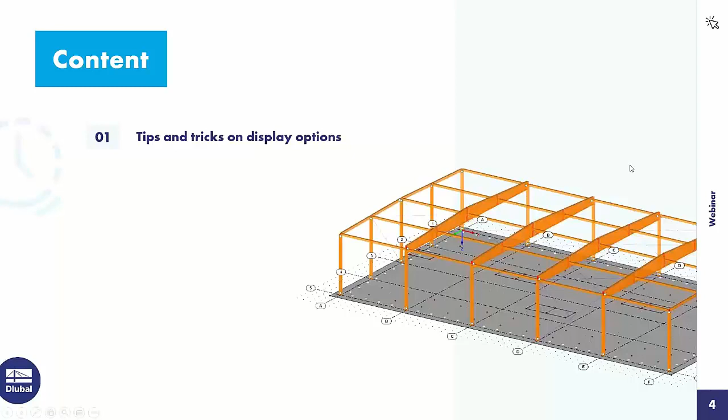To the agenda today, I will introduce some tips and tricks on display options, also on the printout report, also basic information. I do a single and mass print of graphics to the printout report. And I show how to create a verifiable printout report. We turn directly to the program.

RFEM, that's a storage building made of timber and a reinforced concrete floor slab. Bracings from steel, you can see around here. The model is completed, it's designed, the timber structure is designed, and also the concrete structure.

We can go through the load cases, self-weight with roof loads and single loads from racks, snow load, the imposed loads with loads from forklifts and from the racks. Wind in X direction, Y direction. Imperfections in X direction and Y direction. Pre-stress. And then there are a lot of load combinations that are automatically created by the program.

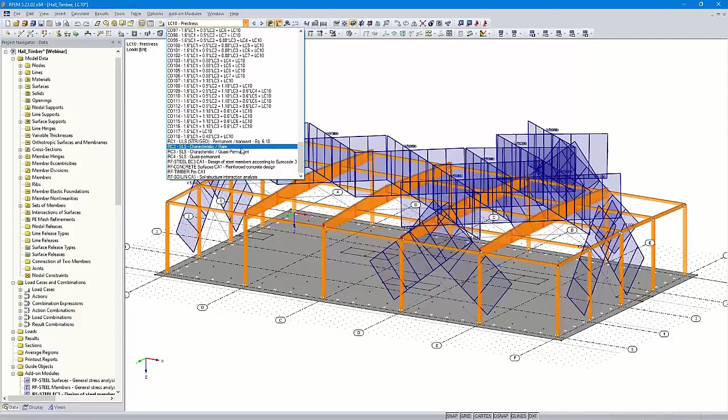Also four result combinations, one for the ultimate limit state design, three for the serviceability limit state design, then the design of the steel structure. Those are only the bracings. You can see a design ratio of 55%. Then the concrete results, also for the floor slab.

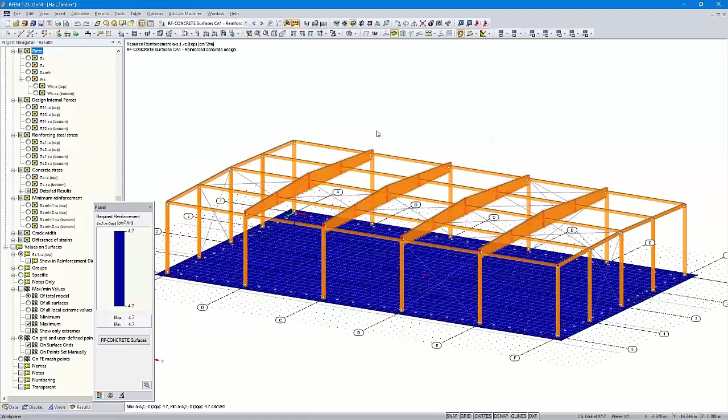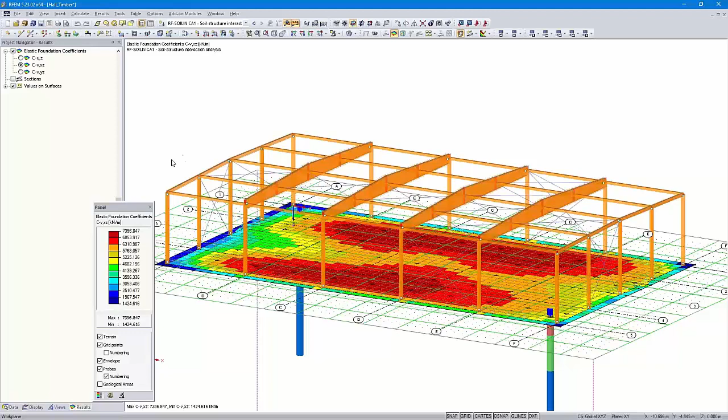Then the results of the timber design. Here you can see a design ratio of 94%. That's in the horizontal beam here, the maximum design ratio. Then I used RF-SOILIN to determine the elastic foundation coefficients. But we want to start with the member results. We want to print them in the printout report.

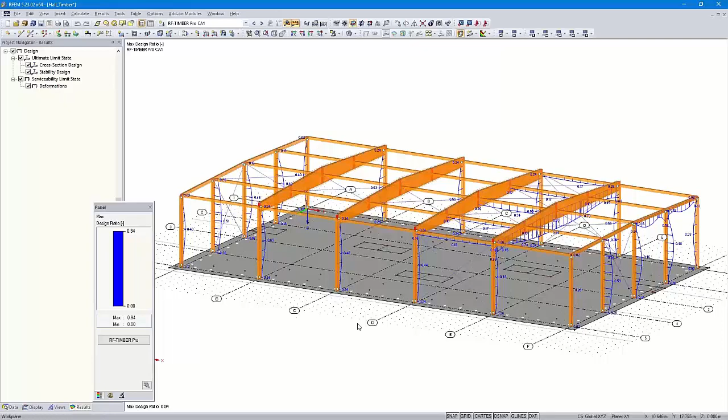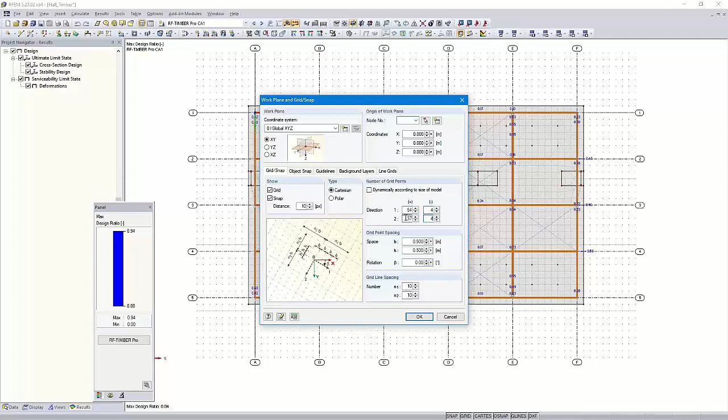But at first, I would like to move the axis designations closer to the model. How to do that, I can show you maybe in the set view. We go here with a right click in the grid options, edit. And then here is checked dynamically according to size of model. We uncheck it and then I subtract here 5. Okay, and then you can see the axis designations are closer to the model.

You can also hide the axis in the display navigator under here, guide objects, and then you can uncheck the line grids and the axis would be hidden, but we would like to show them and document them.

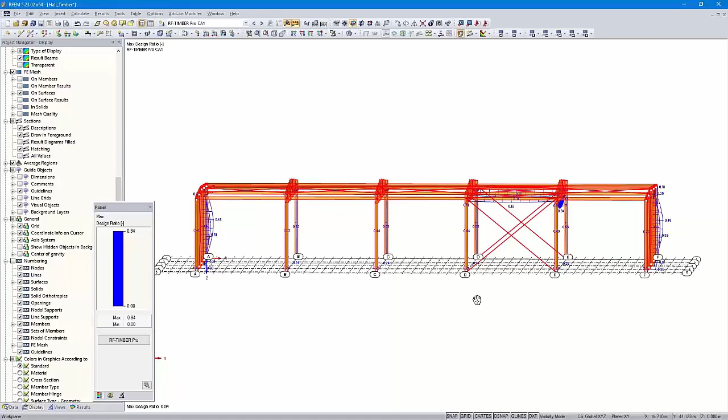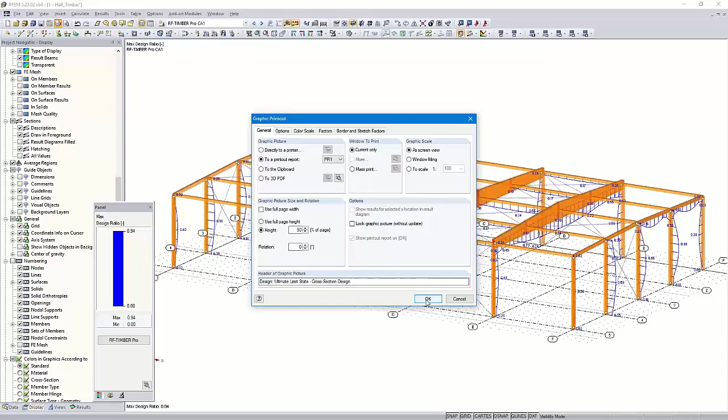Okay, then I make only the timber structure and the steel structure visible with that option, visibility by selected objects, and the concrete floor slab is hidden. Let's print that graphic in the printout report. Here above, print graphic to the printout report, the current only as screen view, that's the options I will use. Then the height, 50% of the page, no rotation, and I confirm that.

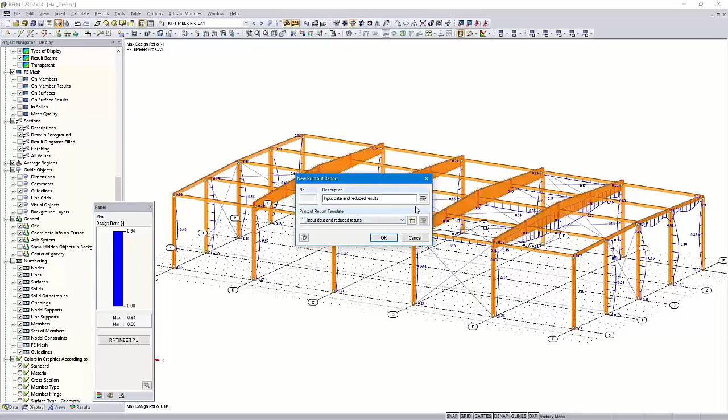So usually we would print the graphic with this option here for the printout report, input data and reduced results. But you can also use other options. But in that case, I would like to disable a lot of pages because we want to print the graphics firstly in an almost empty protocol, or in a protocol with not so many pages, and therefore I disable here the RFEM data, the RF-STEEL data. I leave the concrete and timber data because we would like to print graphics in those chapters.

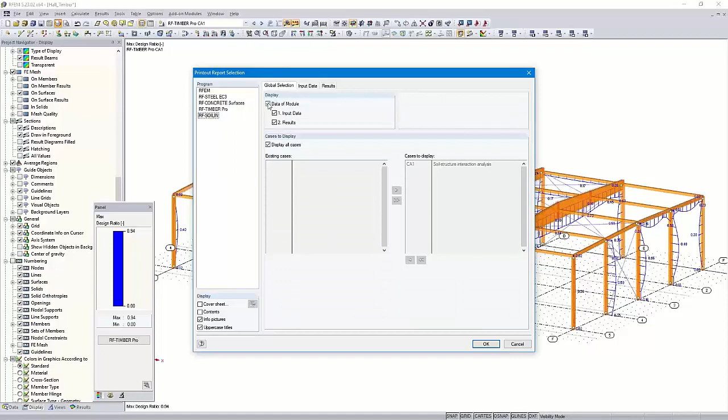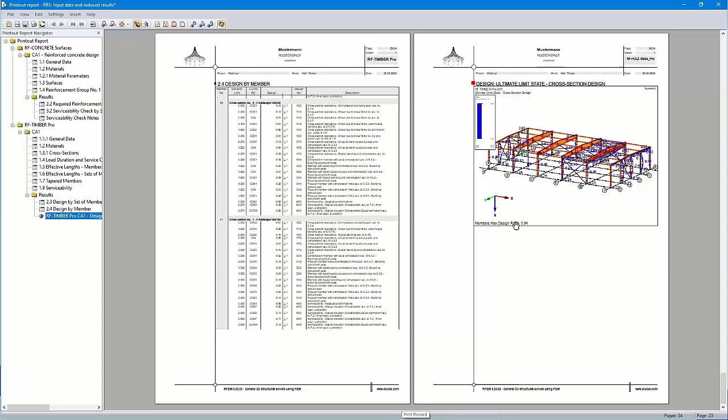Okay. So now a printout report with only few pages is created. At the end, we will have more than 170 pages. Now there are only 24, and the handling of the graphics is much better. But we can see that graphic is quite confusing, but we can modify that afterwards. By right click, I can open the properties and I can rotate the graphic. At first I use the full page height and rotate the graphic 90 degrees.

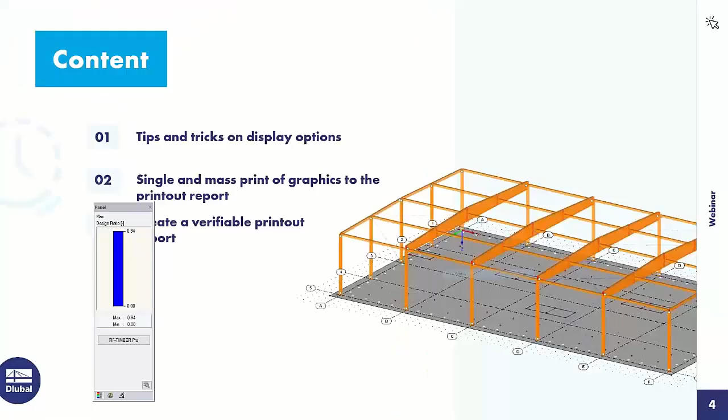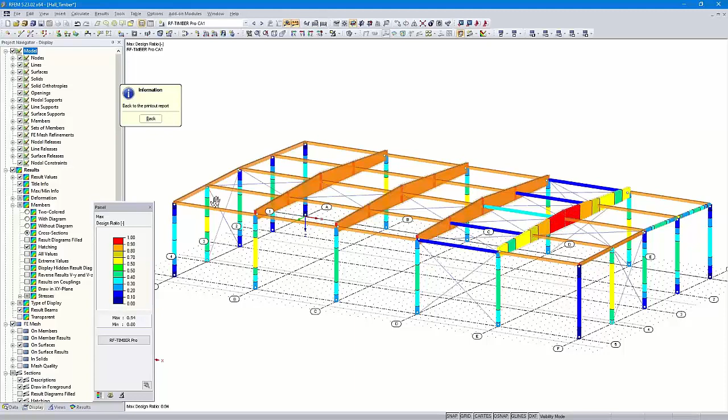Okay, quite better, but I'm not satisfied with this graphic. I will change it here with right click and edit. I go back to RFEM, and then I can set in the display navigator under results, members, here the option two-colored, that's the current state. Then with diagram, it's colored here. Then without diagram, and cross sections. I think that's a good overview. You can see the maximum design ratio is in the horizontal beam here, and I can go back to the printout report.

Okay, that graphic is much better. We will use it, and we would like to print that graphic of the axis E separately in the printout report. We leave the printout report with saving that graphic.

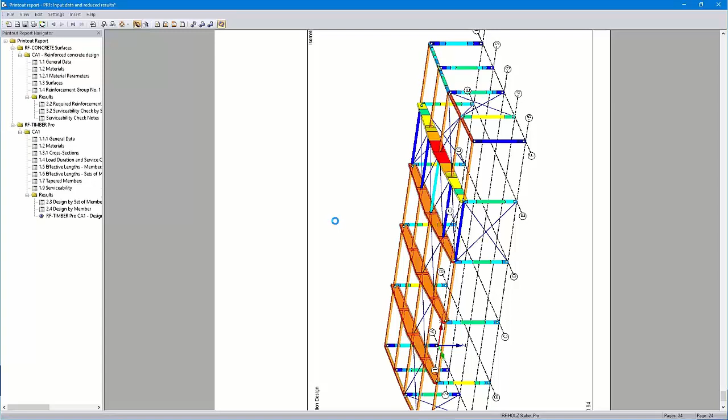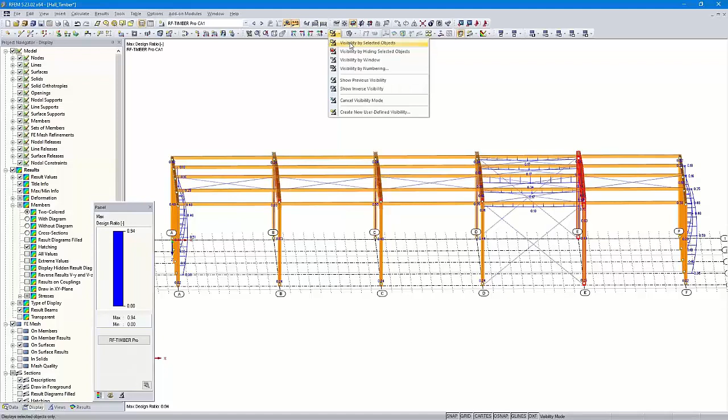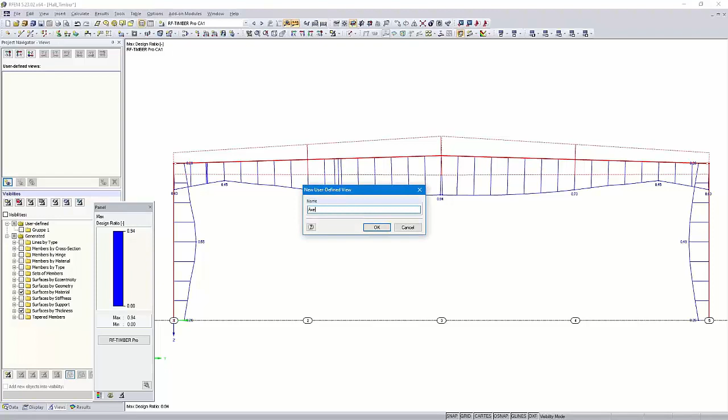Then I create a new visibility. I use this time this option here. It's the same as when I click on the right mouse key, visibility by selected objects. I use the wireframe display model, and we can create a view. For example, here, create new user-defined view. I can call it axis E.

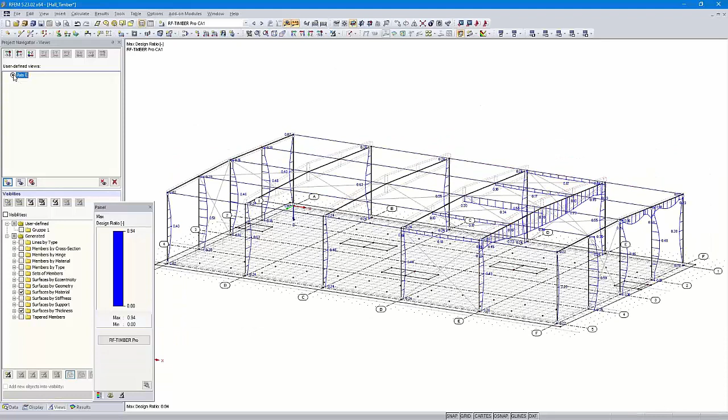Okay, and you can go back easily later to this graphic. I can show you. I cancel the visibility mode. For example, this view, and I click here to axis E and come back to this graphic. Okay, here you can see the 94% design ratio. We print that graphic. That's quite easy now.

So now also that graphic is created. It's quite sufficient. I could make the panel smaller here with properties. I can use a color scale and width of 20%. Okay, that looks better. I could move that on the right side a little bit, but I don't do that. We leave the protocol with saving the graphics.

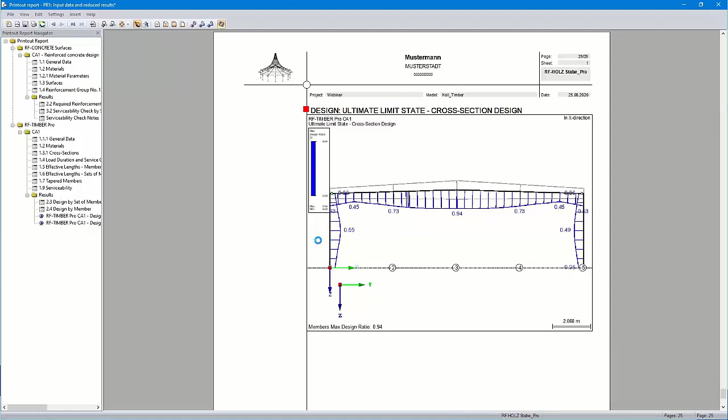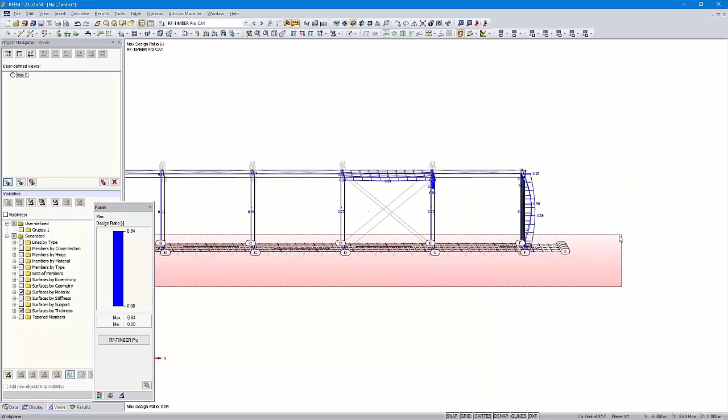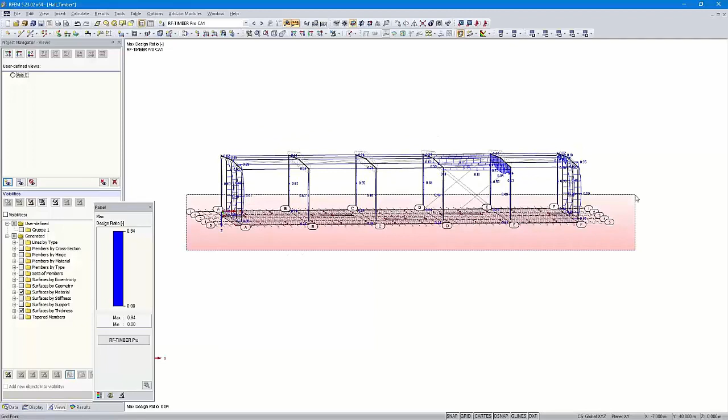And then we print the reinforcement results. Okay. I choose only the concrete floor slab in the view. Just a moment. Okay. So, a view in Z direction.

A small tip: when you zoom in and out in a graphic with the mouse wheel, you can see steps. If you want to zoom in and out without steps, you can press the Shift key and the middle mouse key, and then move the mouse back and forward, and you can zoom in and zoom out continuously. Okay, just a small tip.

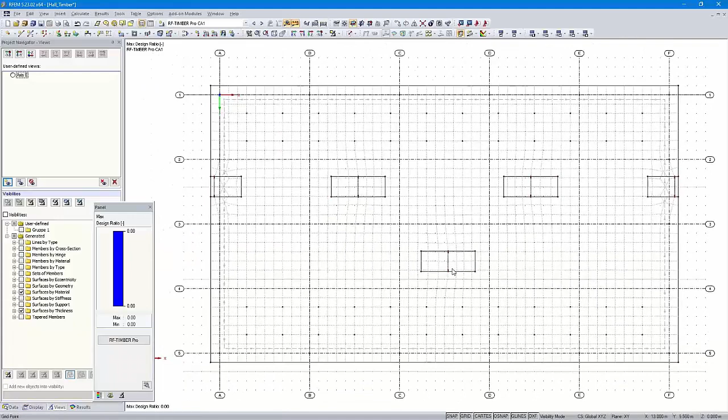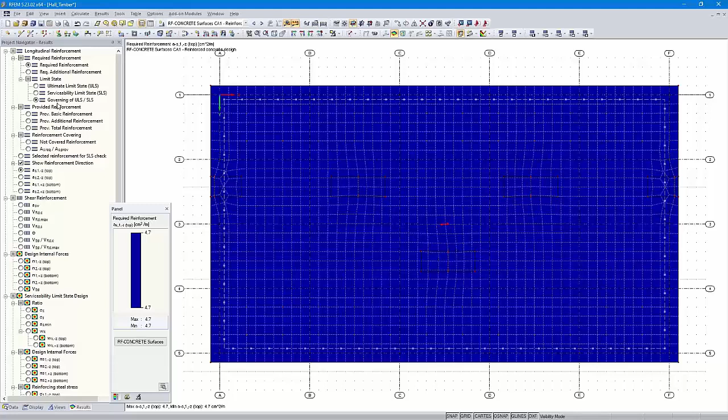Then we go to concrete surfaces and the results. Those are the required results governing of ultimate limit state and serviceability limit state. You can see there are almost the same values in the concrete floor slab because of the restrained design.

I use in this webinar the graphic of the ultimate limit state design. The graphic has more different values. You can see here the values between 0 and 2.7 and 0 and 2.8. Those graphics are more informative. Okay, I could print that graphic. That would be absolutely sufficient.

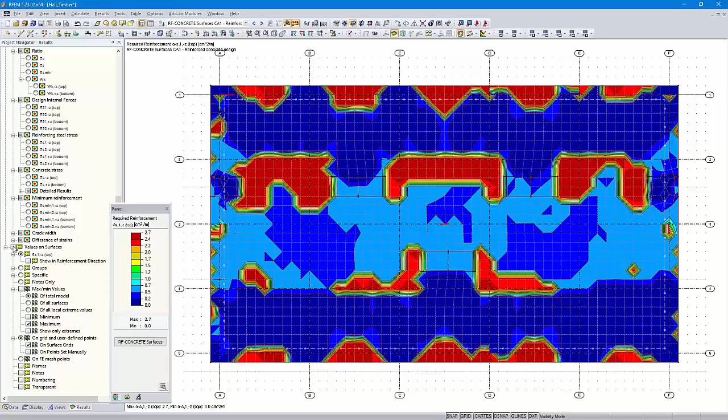But I would like to do a task that is more difficult. I would like to print a graphic with all values in all grid points. I check here values on surfaces, on grid and user-defined points. And when I have got here all values, I can use here not the ISO bands, but the ISO lines.

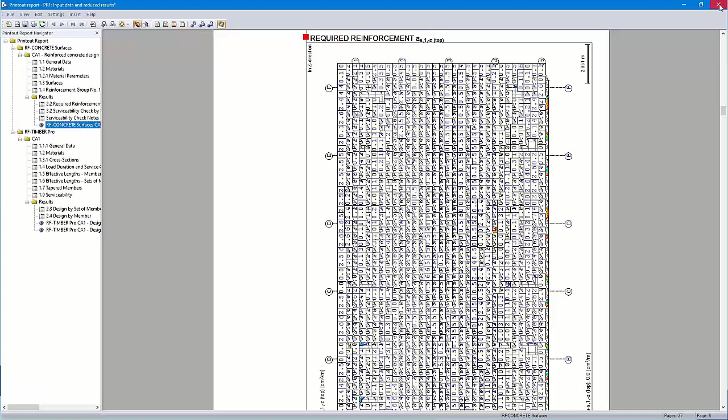And then I test the print. I print the graphic. I use the full page height and rotate it 90 degrees, and we will see how it looks. Now we can see the values are too large. The graphic is quite confusing, and we leave the protocol without saving.

By right-click at one value, we can open the display properties, and we are in the right place here, result values on surfaces. We can change the settings here separately for the screen and the printout report, but we can also use identical settings for both. We change only the setting for the printout report.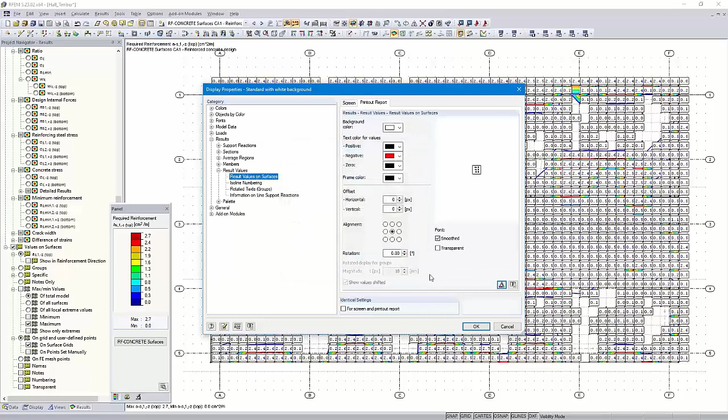I use here for the values the black color. Then I delete the arrow here. Then I move the values in the middle of the grid point, and I change the font size to 4. That's in German because my Windows is in German, but it doesn't matter. So, okay.

And then we print it again. Same settings. And just a moment, and then we will see that it looks now much better.

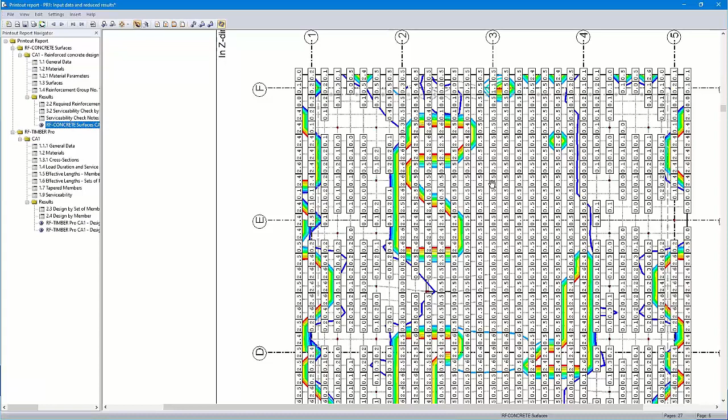Yeah, now we can read all the values here. At least for a PDF print, it would be absolutely okay. Then we leave the printout report because I would like to show you a mass print only for 4 pages for the 2 directions here, and for the top and the bottom, meaning the reinforcement.

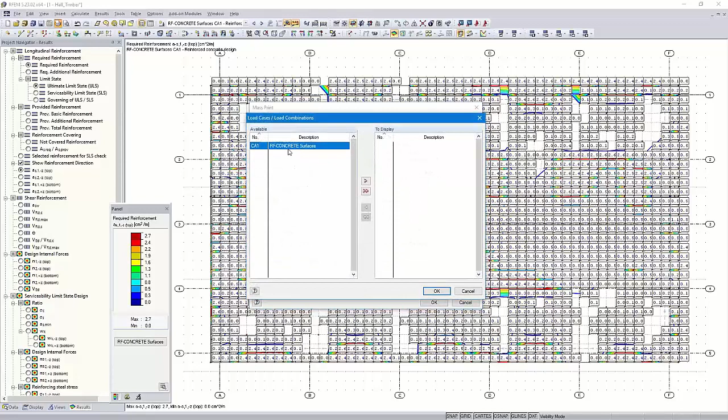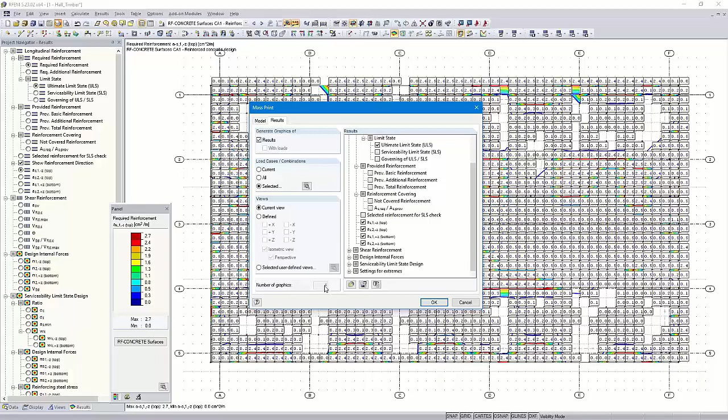I go here to print again and choose here mass print. I change the mass print settings and I select the concrete surfaces, model data, choose here ultimate limit state design and AS1, AS2 for the top and for the bottom. I could also add here other graphics, but for this example, 4 pages or 4 graphics are sufficient. You can do that the same way if you want to print more graphics.

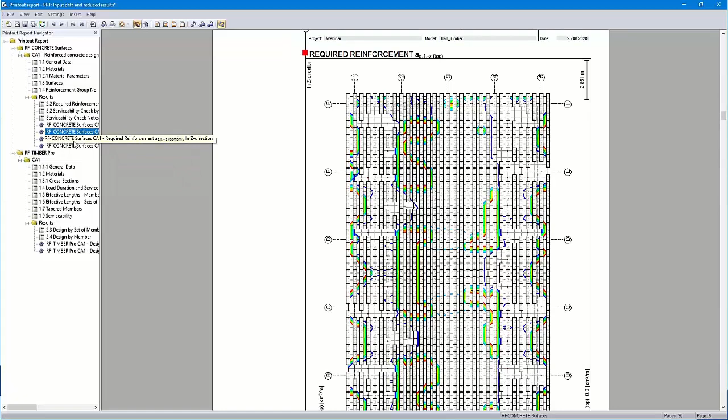The mass print works for member graphics or graphics with member results as well, but I would like to show you the function for the surface results. Okay, just a moment, and then all graphics are visible. I click our graphics here. You can see it's okay.

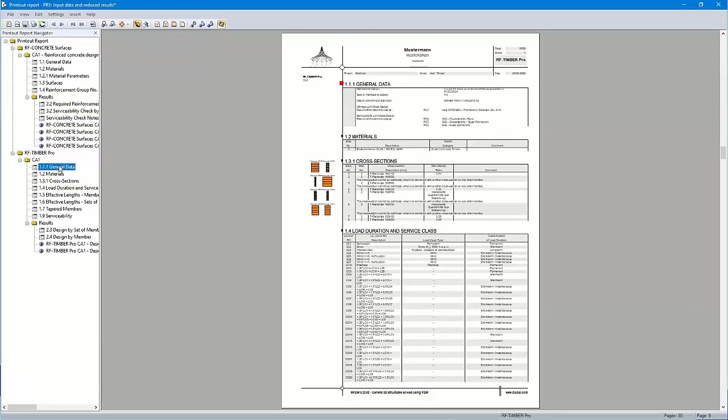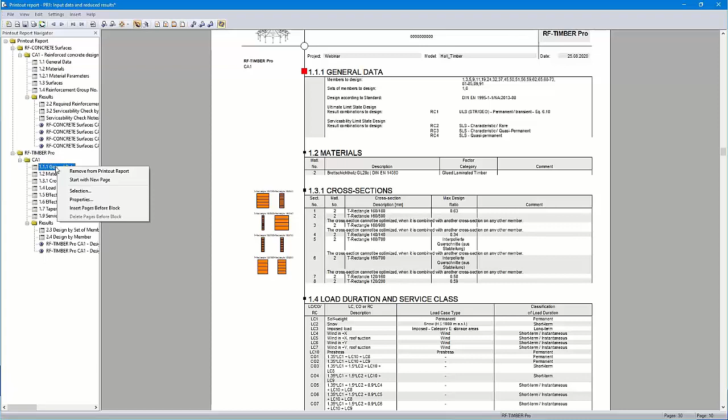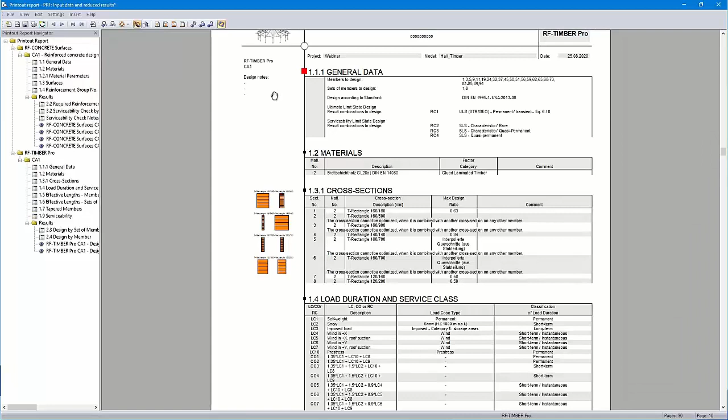Okay, a small tip. For example, if you want to add comments, etc. here in the left column, you can click here with the right mouse, then properties, and you can add text here. For example, design notes. Just an example. Here you can see it. Just a small tip.

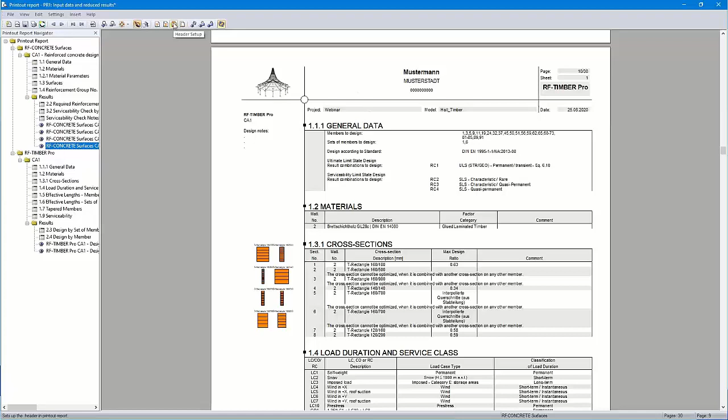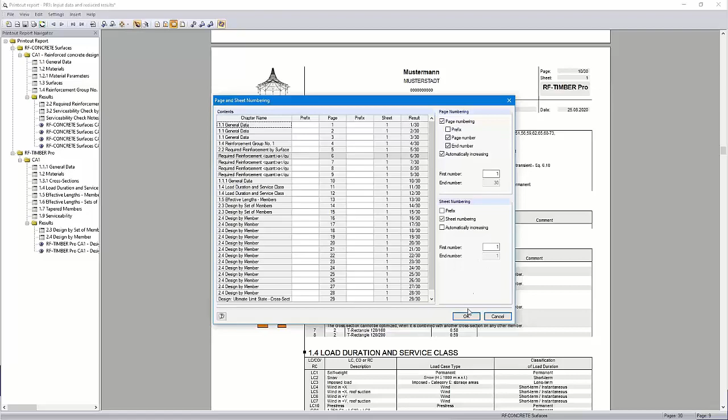Okay, then some basics. For example, we can create a header with a click here, header setup. We can open the library and we can create a new header. I already created a Dlubal header with the name of our company and the address and the logo. You can change the first number of the protocol, for example. In the settings, you can add prefixes, etc. So the header should be okay now.

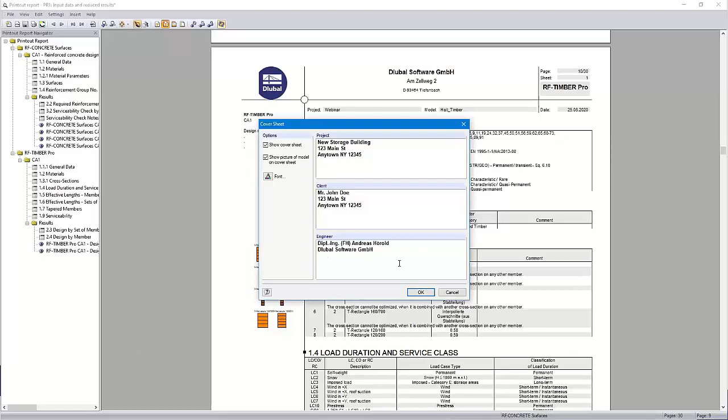Yes, okay. Then we create a cover sheet. Here with cover setup. You can also show the picture of the model automatically. I can add some text here. I prepared the text. It's only fictive text. But we would like to do the printout report complete. Okay. That's the cover. Okay, you can see that doesn't take much time. We can go to the next point.

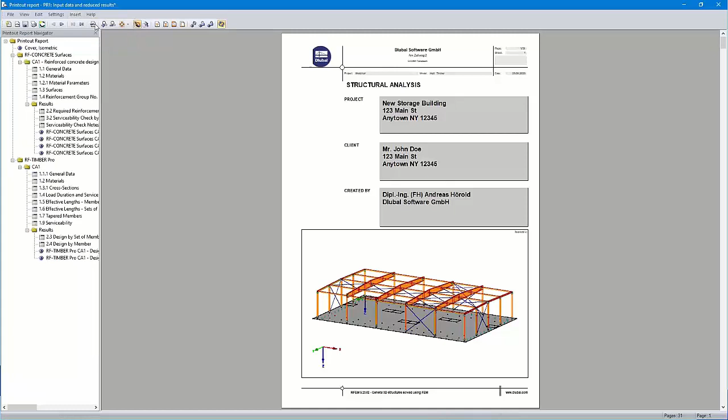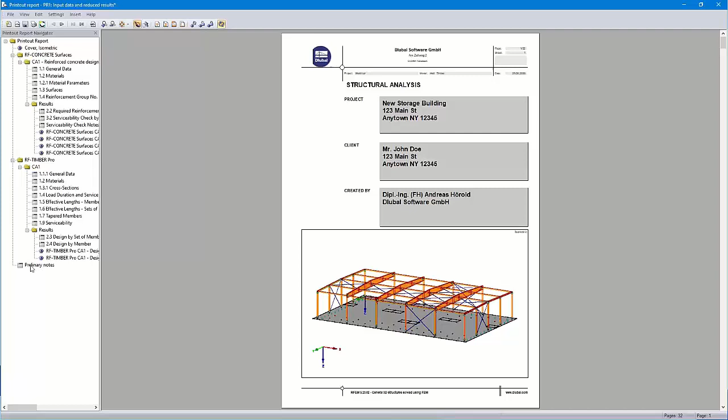You can insert text blocks, text files, images. Now I will add a text block. Here the preliminary notes. I have prepared also some dummy text. Only the first sentence is correct, the rest is dummy text. It will be added at the end of the protocol, but we can move that later to the right place.

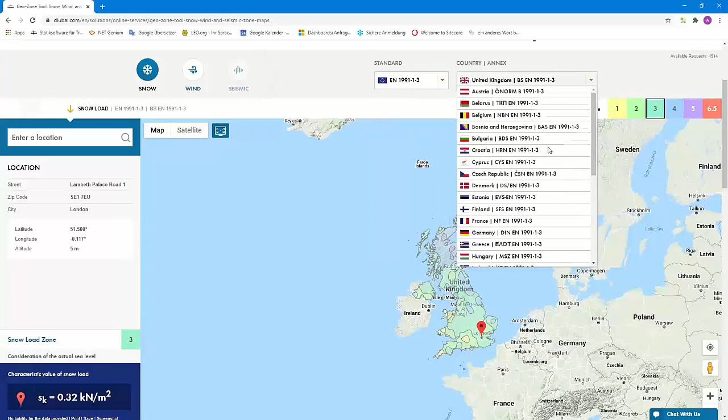I will add an image from the clipboard. I go to our website, and here under solutions, you can find the online services, for example, the GeoZone tool, cross-section properties, the glossary. I think some of you know that tool already. It's for free. We have got a lot of standards here, international standards, also the Eurocode with the national annexes. I use Germany here. I entered the address of our office in Leipzig. Okay.

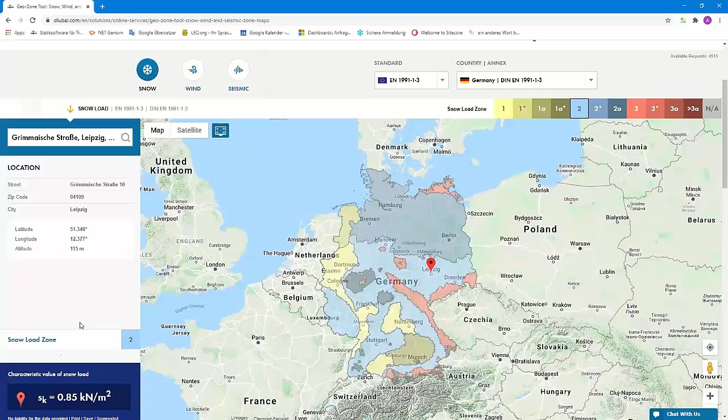And we can see here snow load zone 2 and the characteristic value of the snow load. And we can create a screenshot. Then we can open it with an image tool. For me, that is Snagit. I can copy it to the clipboard and then insert it into the protocol. I call it snow load zone. Okay. And you could do the same with the wind loads, etc., earthquake load zones, and so on. Also other graphics.

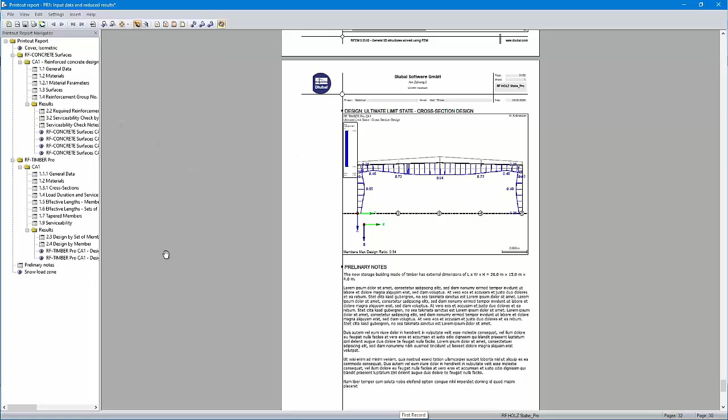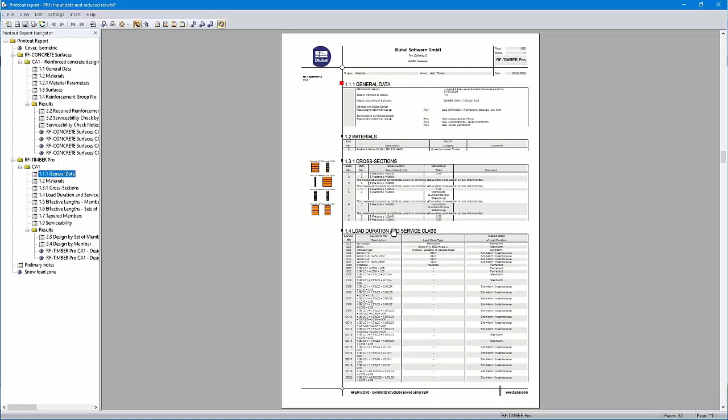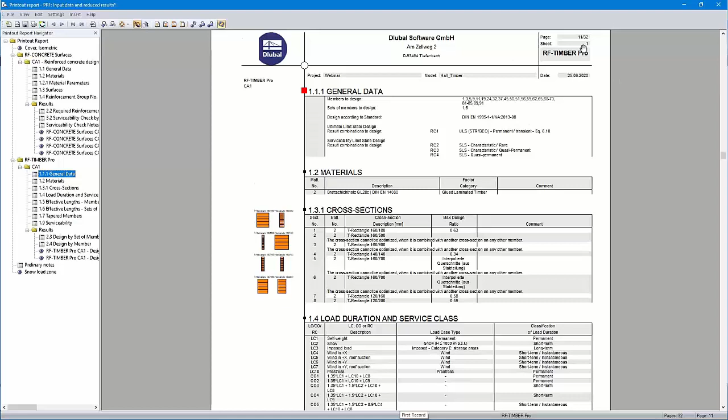Okay, in the next step, or some other tip now again. You can add empty pages here. For example, you would like to add pages from external programs, etc. in your protocol. And then you see here that is page number 11. And by right click I can insert pages before the block. I call it test and 5 pages. Okay.

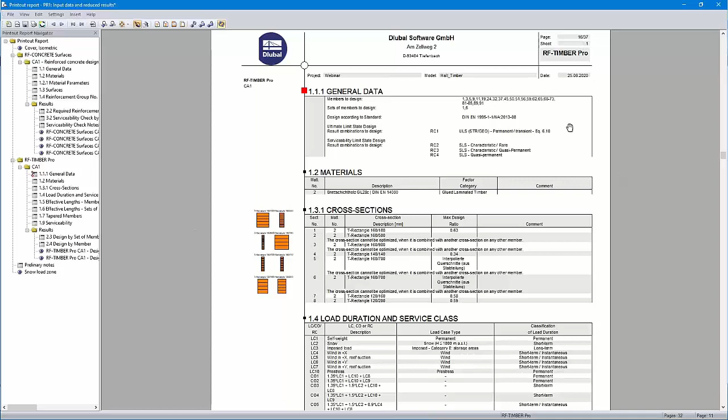And then you can see it's page 16 and this page is page 10. Oh. But I will delete them. Okay. Just for info. Now it's page 11 again. And the next step is select the topics. First I check contents here. We would like to show the content.

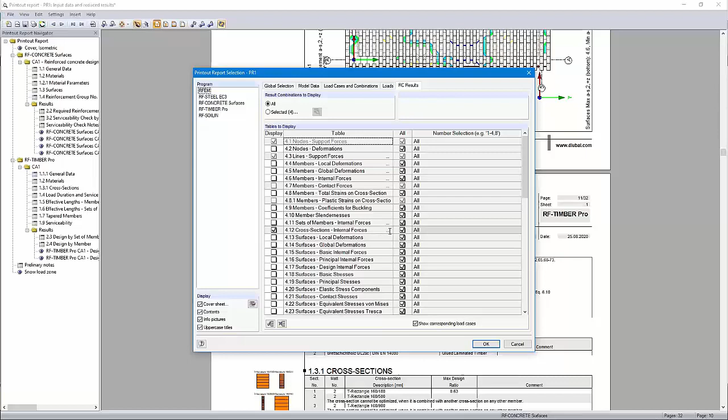Then the RFEM data. I choose then the steel data. Those are already in the protocol. Okay. Now you can use the settings which you like. Yeah, you can disable some content. For example, I will disable here the results of the load cases and load combinations, and use other settings for the cross-section internal forces. I choose here not the partition values, but the extreme values of the cross-sections. Okay. Therefore, the protocol will not have too many pages.

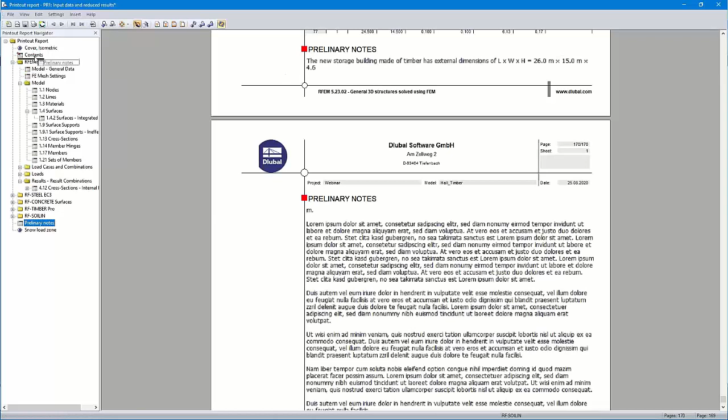Okay, then the whole protocol is created in a few seconds. So you can see all the module data. I moved the preliminary notes to the beginning. Just a moment. You can see now we have got 170 pages. So I move it behind the contents. Okay.

Now our pages will be renumbered. It takes some time. So, and I moved this snow load graphic here into that chapter. I have to wait some seconds. Okay.

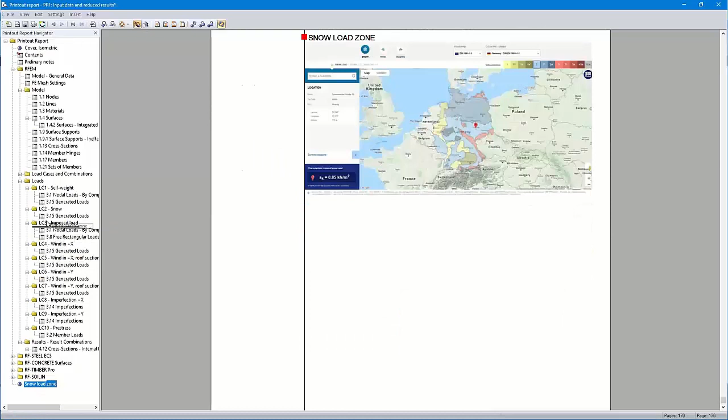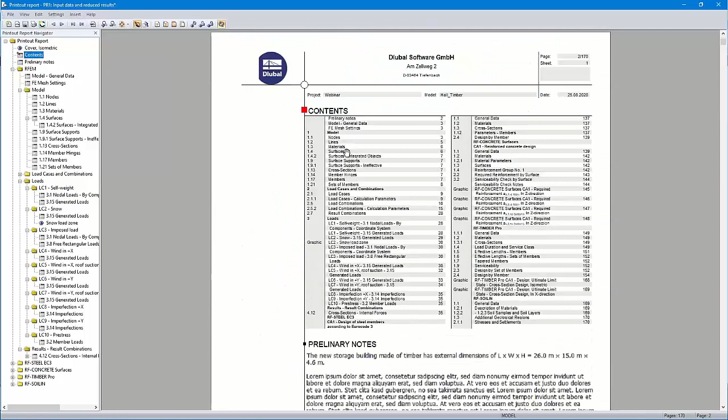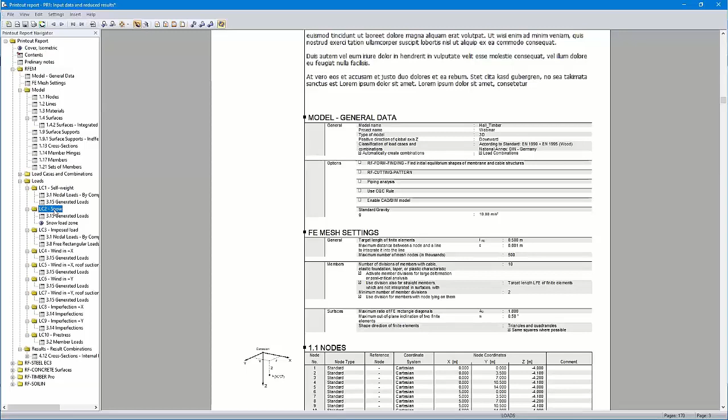So we jump to the preliminary notes. The cover sheet, the contents, preliminary notes, and then the RFEM data are shown. Here, snow, the generated snow loads, and the graphic from the Dlubal homepage.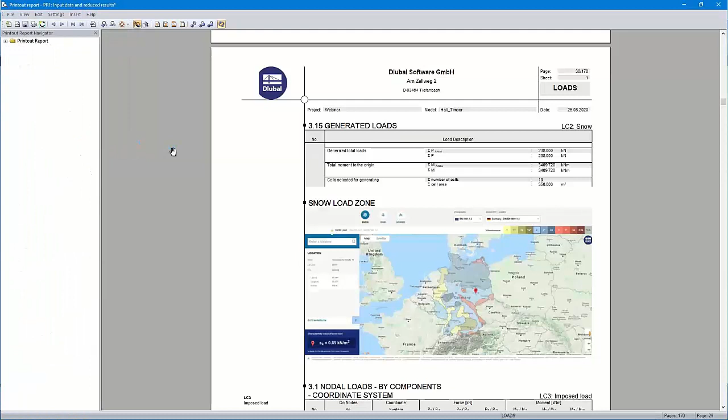Then it's possible to translate the protocol. There are 13 languages available: German, French, Italian, Russian, also Chinese, etc. By clicking here to French, the whole protocol will be translated in a few seconds. You can see here the text is already in French.

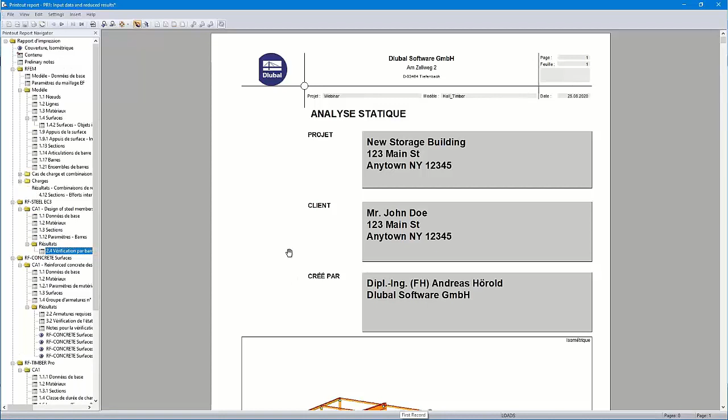Okay, we have to wait some seconds. I will show you some other parts. Here, the whole protocol is now in French. We translate it back. Okay. That will take some time.

You can export the printout report to VCmaster, for example. How to do that, I would like to show you with the help of a knowledge base article. Sandy Matula wrote this article, and she also did a short video where you can see how it works.

You can also print the printout report in a PDF, etc. on my printer. I can show you File, for example, export to PDF, export to RTF. That's a text file. I can print it directly to a printer, also to a PDF printer. I can start it. It would take some time. I cancel it. Okay, and show you the complete report instead.

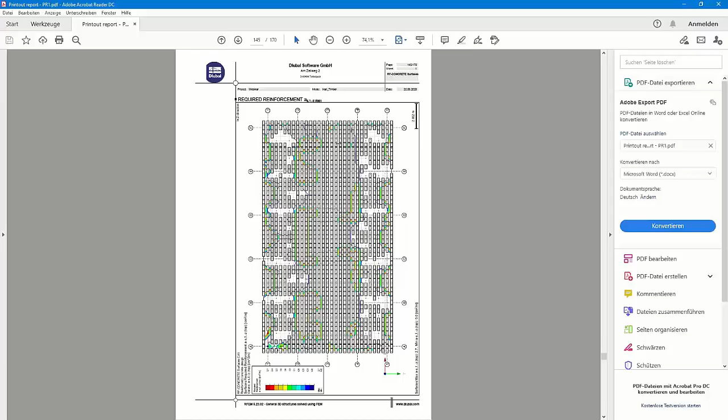That's the PDF. You can see the graphic here. It looks quite good. That's the whole printout report as a PDF file.

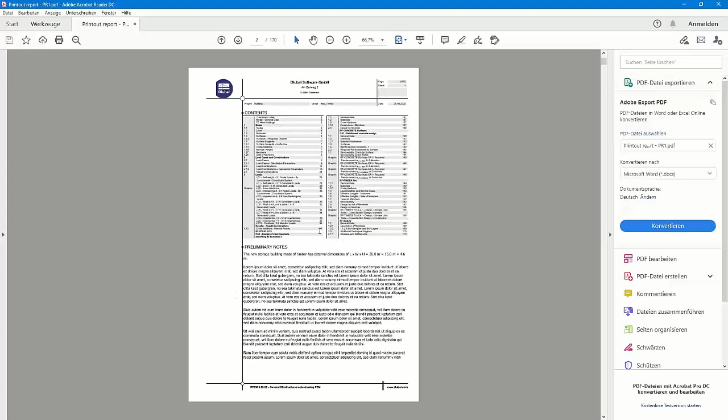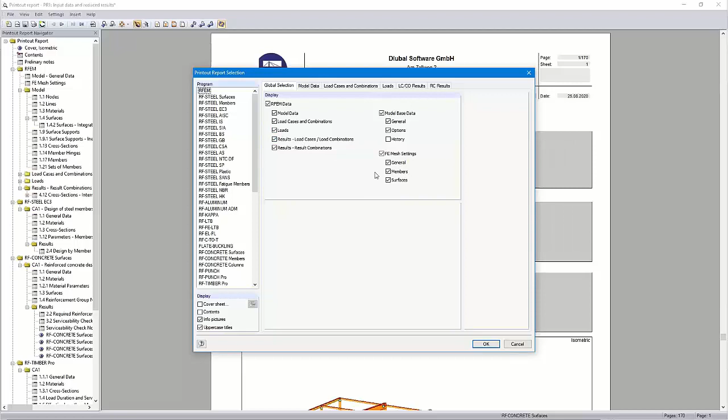Okay, another tip, you can save printout report templates. For example, you can use those settings here for a new template. Then you need to choose here New from current printout report, and then you can enter here a name and save it. You can also save a new template. You can here check and uncheck the chapters that you want to display. Okay.

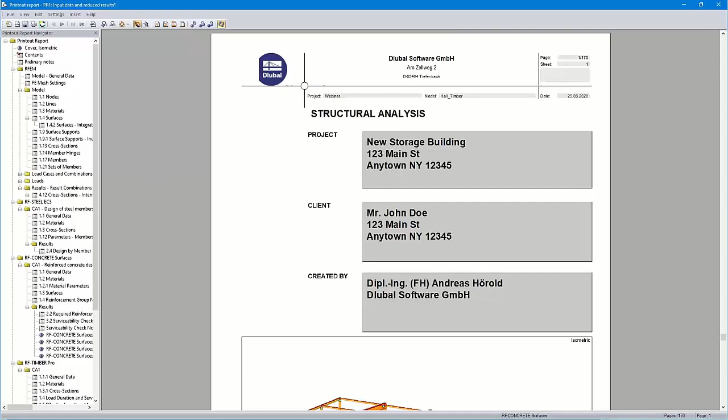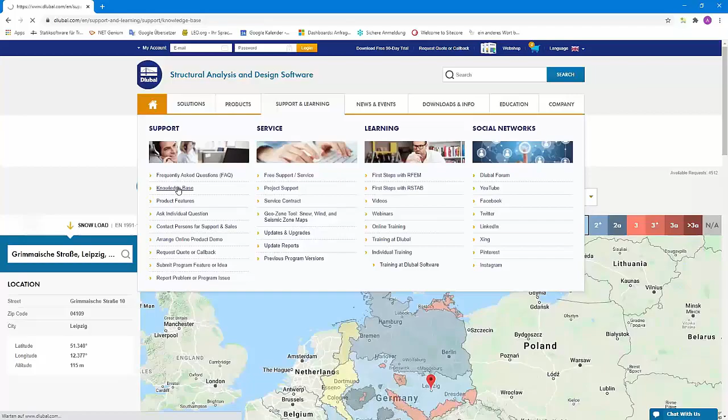As promised, I show you the article about VCmaster. Here under Support and Learning, you can find a lot of FAQs and knowledge base articles. I open the knowledge base database. You can see a lot of articles. I use the full text search. VCmaster, I searched already in the test for it. Okay, here are 3 articles.

I will show you the article Export to VCmaster. Here's a short description. Here you can see that Sandy wrote it. Maybe we can take a look at the video. An easy beam, free field beam with a cantilever, and it's printed in the printout report as we did it in the webinar today. This simple example has only 4 pages.

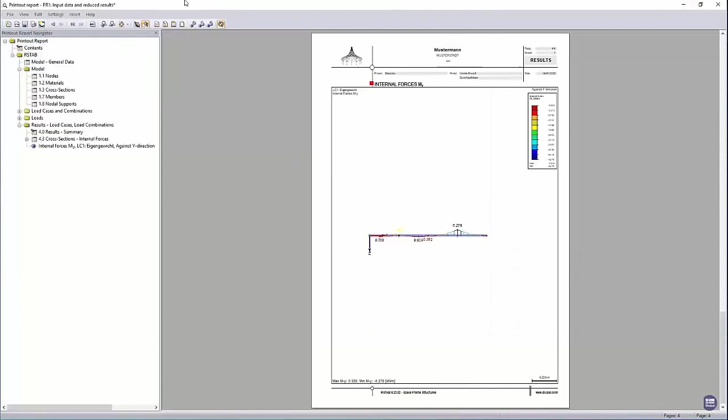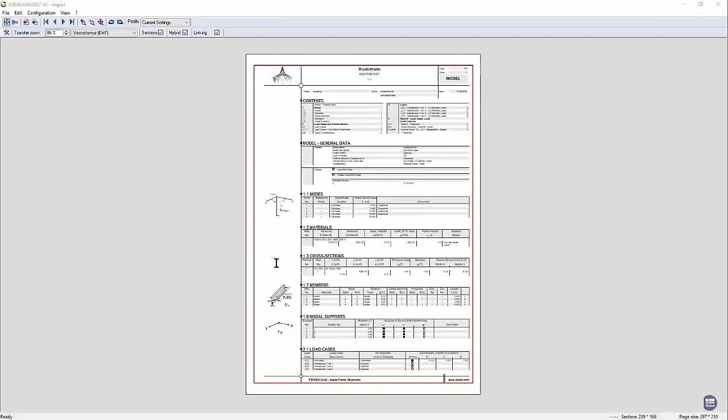Now with that graphic, VCmaster must be opened before you export anything from the printout report to VCmaster. Then you can click at the top to VCmaster, and then you can choose the pages that you want to export. This report has only 4 pages, and all pages are transferred in some seconds. Yeah, okay.

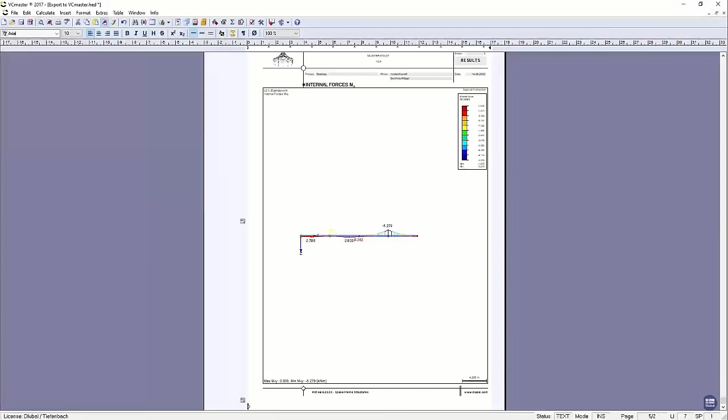You can also add to this VCmaster tool other printout reports, also from other programs. Yeah, it's quite easy to handle. Just test it. Okay.

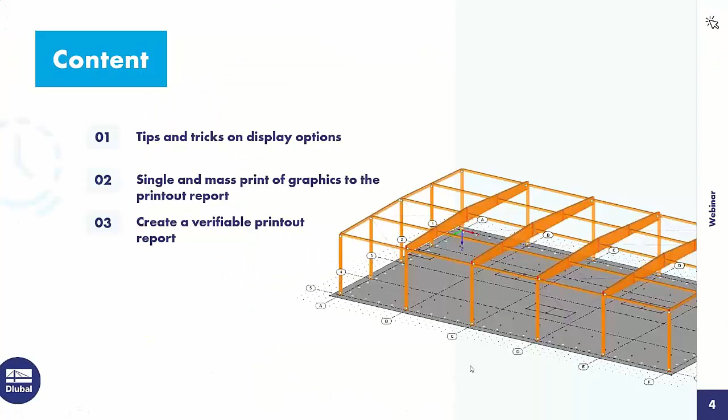Then I go back to the PowerPoint presentation. I would like to introduce you to some free online services. I already showed the Geo-Zone tool with a lot of codes where you can determine the snow, wind, and seismic load zones, etc. Then the cross-section properties. It's also a free online tool for standardized sections, and you can also define your own parameterized cross-sections and then calculate the properties. I showed already also the FAQs and the knowledge base. A lot of valuable, informative stuff.

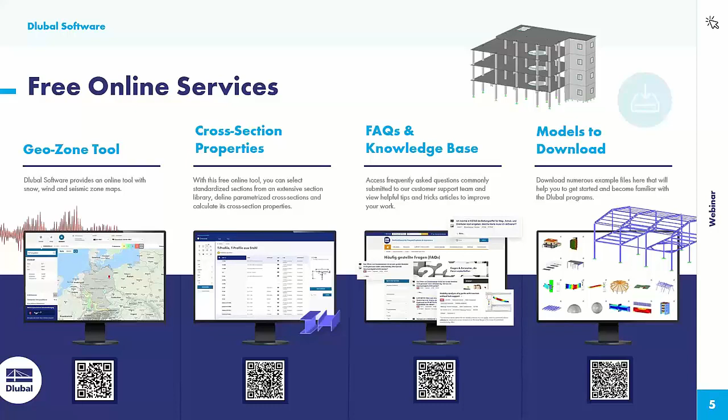Then you can download models from our website. The Dlubal engineers created them. You can find there also the model of today's webinar, also of our webinars. Then I've got our YouTube channel with the webinars and the videos, all for free, of course.